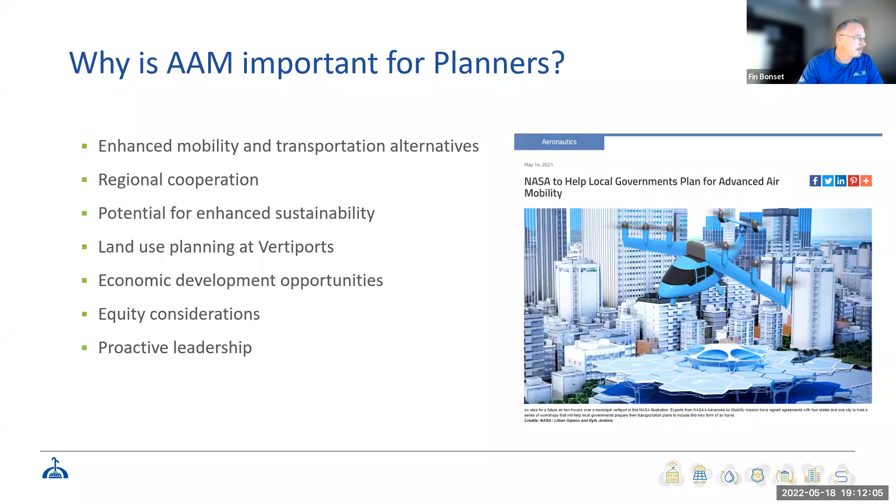From an airport perspective, drones, UAS type vehicles and autonomous vehicles are already being used for surveying runways, airport facilities and things like that. So the technology is out there. But in terms of bigger vehicles, I think the public services element is going to be really important and good for us to understand how this will operate.

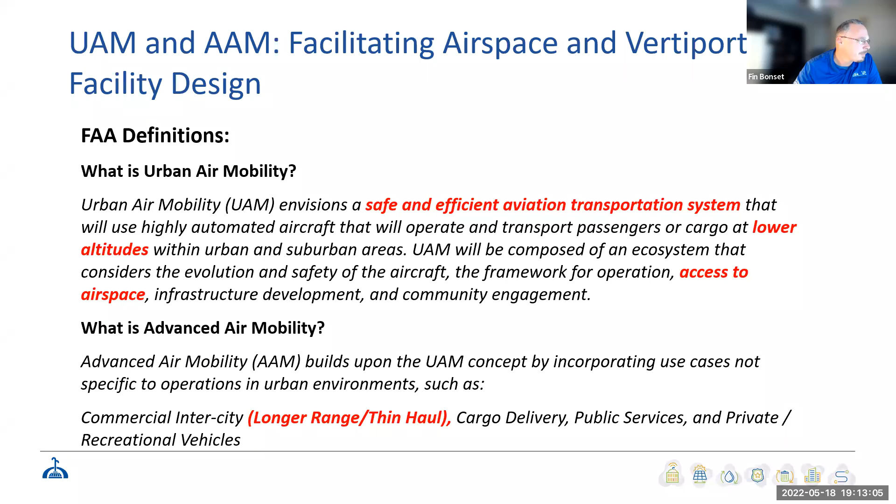One thing I want to transition with: we're talking about the complexities of having autonomous vehicles within an existing airspace system. Essentially these eVTOLs have to compete with other air traffic. Even if you look at the definition of advanced air mobility or urban air mobility from the FAA perspective, they've already put in the definition that these are going to be low altitude vehicles. It's the only way we can have such high volume of vehicles within our airspace without conflicting with commercial air traffic and smaller general aviation aircraft piloted by humans.

That's important, but how do you organize that? I want to give you an idea of the complexities involved. Essentially there's three kinds of airspaces, and I put that in quotation marks because they're a little bit different. If we talk about the large scale airspace, I don't know if we have any pilots in the room. I'm a pilot myself, so I know a little bit about this, but we have essentially the big airspace that's controlled or uncontrolled, and it consists of classes.

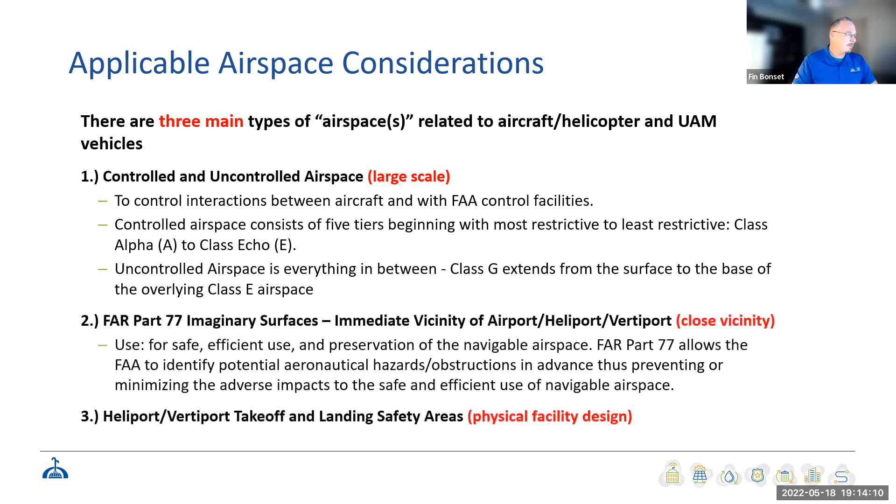That's all controlled, which means that there's rules that govern that controlled airspace. You have to stay away from a certain aircraft. You have to stay above or below a certain aircraft. You have to stay away from certain clouds. You have to fly different altitudes depending on the direction that you go in. So all these items, right, we still have to consider that from a UAM and eVTOL perspective as well.

So in order to enter the airspace, you have to have, one, two-way communications. Two, you have to have permission to go into the airspace. And three, you usually have to have some sort of a transponder that sends out a signal that you're there, so you can be controlled by the FAA, by air traffic control. So if you now think about that unmanned aerial vehicle, or even a piloted vehicle that is a drone or a UAS type vehicle, these things you still have to consider, right?

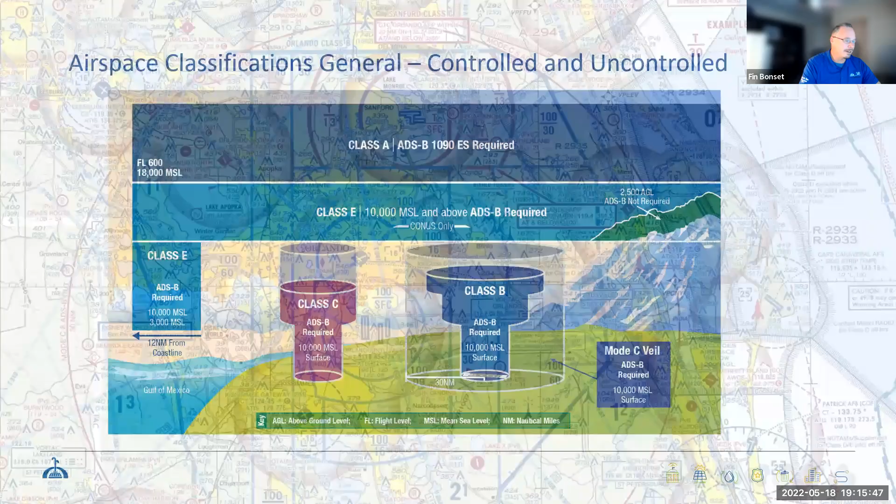So it's all about control, but I just wanted to give you an idea of how complicated that is from an overall airspace perspective. And when I show planners this, even at conferences, people are like, oh my gosh, yeah, it's not only the technology for the vehicles, but it's how do we transition these vehicles around cities with all this other airspace around, right? So they're interesting concepts. And right now we're actually working with NASA as part of our team and the FAA to maybe establish some of these corridors between cities, but also within the cities themselves.

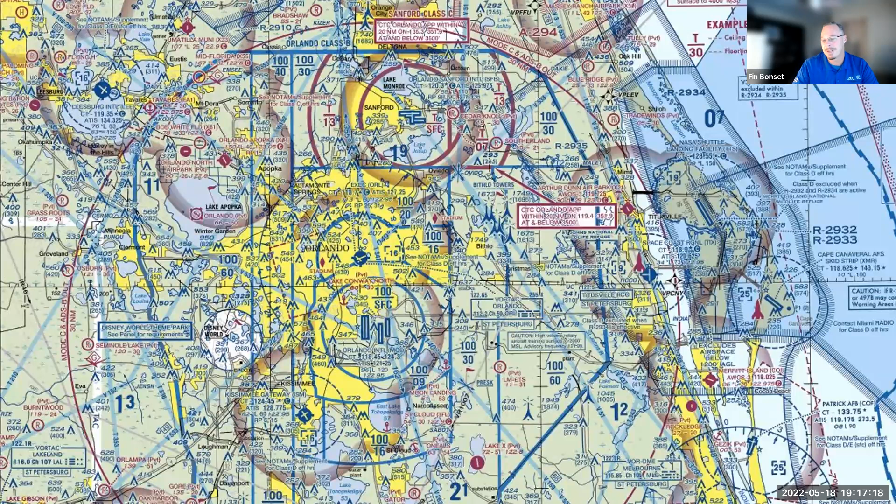Now let's take a deeper dive, right? And you may have seen some of this. If you haven't, I'll explain it real quick. So I was talking about airspace that's controlled around cities and airports, but there's also airspace that's really close to the runways. And that's called civil airport imaginary surfaces. It's Part 77, so it's a federal regulation. And this airspace is designed around runways at airports and heliports for obstacle clearance purposes, right?

So these surfaces are three-dimensional surfaces. They extend upwards and outwards around an airport. You are not allowed to build any buildings, radio towers, antennas, unless you get a waiver and it's deemed safe by the FAA. But essentially, it's the same thing for vertiports and heliports in the future, where we're going to have these autonomous vehicles. You still have to have clearance from objects. It's for overall safety. So again, I'm not going to go into too much detail because we could be here all evening.

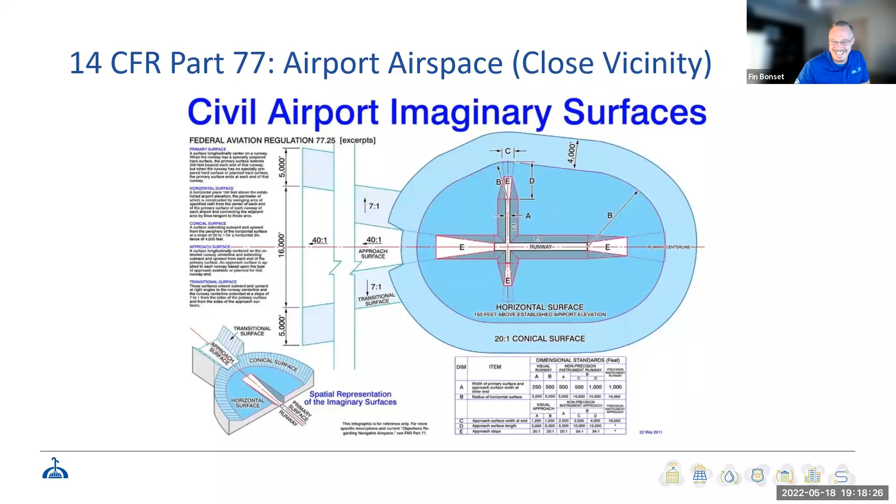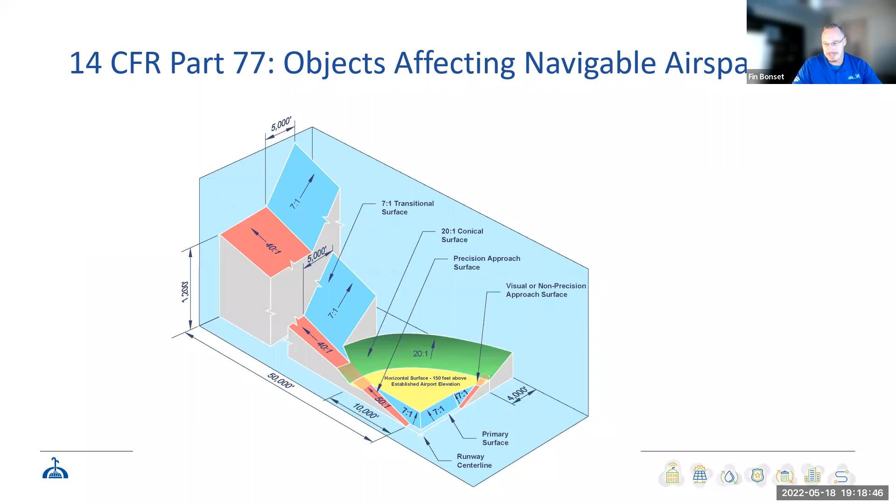But what I want to show you is just how complicated the immediate airspace is near the runways. The slide that you see on your screen right now, you can kind of see a path and corridor for an instrument approach to a runway. And you can see it's a three-dimensional path, and we want to keep all of that clear of obstacles so the aircraft is protected. So it's another element that we typically look at when we're designing a vertiport for the transitions of these UAS elements.

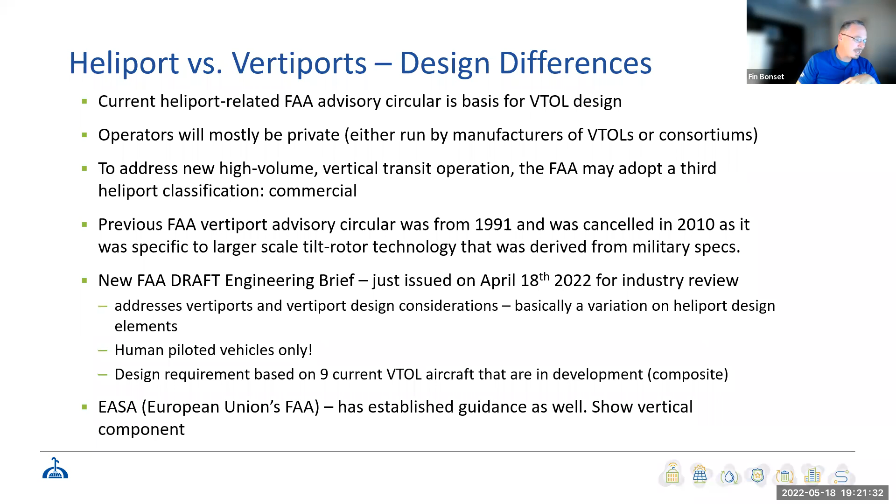But what's neat about this is the design requirements for these vertiports are based on 9 existing vehicles that are being prototyped by 9 manufacturers. So what they did is, hey, how do we size a vertiport? How do we create a sizing element? So it's based on those 9 vehicles that are in development as we speak. And then I'll talk about EASA here in a second as well. But I wanted to show you what that looks like.

So in today's world, and this is directly from the advisory circular, so recommended guidelines for designs. This is for the heliport. So you can see in the center, they've got an H, that's the landing area, that's the concrete pad. Around that is what's called the FATO, the final approach and takeoff area. It provides a little bit of a safety buffer for that helicopter to land safely within the H area. And then around that is called a safety area, and that is to keep it clear of obstacles. So very simple design. This is what most heliports in the world look like, or helipads.

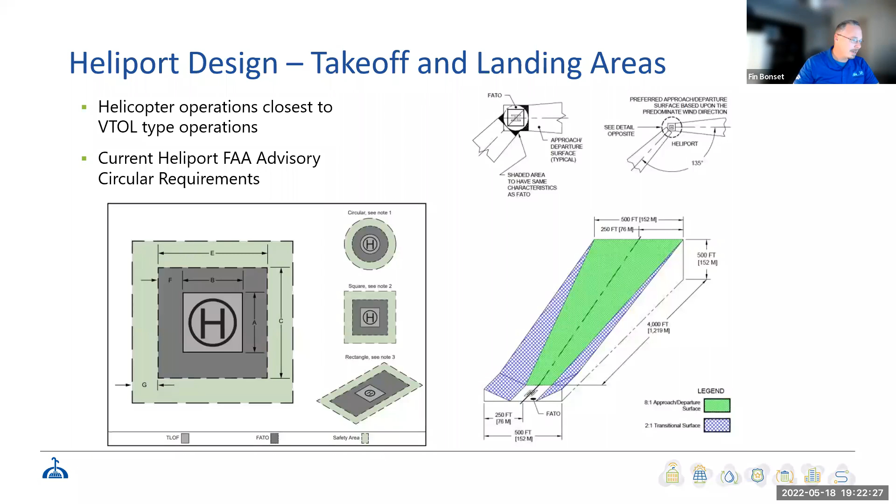And then to your right, you can see again that Part 77, that surface that protects the aircraft that comes in or out from obstacles, right? So very similar. So then if I go to the next slide, this is what's interesting. What has the FAA done? You're thinking, oh my gosh, this is going to look totally different. We've got these cool eVTOL vehicles. Well, not too different. All they've done is kind of change the symbol.

So in the middle, okay, here's a vertiport landing area. Now they did change the dimensions. The CD means the controlling dimension. So instead of with a helicopter where you have one blade, that's typically the longest part of that aircraft, this is based on the longest section, including rotors, right? So it could be longitudinal or lateral. So again, it's a controlling dimension, but it's identical.

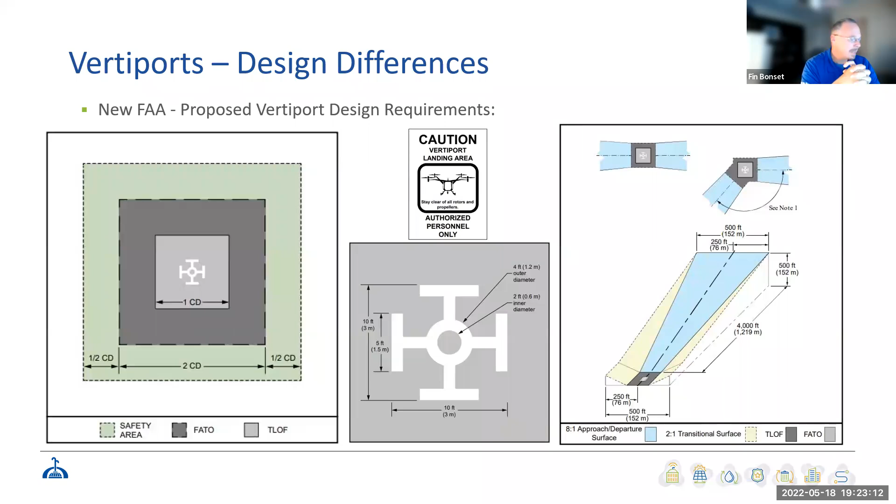You have a TLOF, a FATO, and a safety area. And you can also see they didn't mess with the obstacle clearance requirements on the right. So the same protected airspace is still there. So not too dissimilar, right? But then again, if you look at what the Europeans did, this is EASA. So this is basically the European Union FAA.

So what I wanted you guys to get out of this is that there's still design elements that could be brought into designing vertiports for UAM or UAS type operations. So I just wanted to show you that's kind of the state of the union. Me as an airport planner, airport designer, I try to keep up with this so I can help clients design these. But if you think about a vertiport and the future of autonomous flight, you're going to need a vertiport with multiple locations because it's all about volume.

So there are really interesting concepts out there where you have these vertiports above highways. They look like pedestals, and you've got like 7 of these automated, autonomous vehicles flying out of them, and that really is the future. You can only do so much with a single vertiport, but this is where we are right now.

One of the notions that we've heard about looking at where to put vertiports has been really adapting existing infrastructure or buildings such as older, unused, or economically distressed malls into vertiports. Is that something that you've heard discussed? And what are some of the benefits versus limitations with that concept?